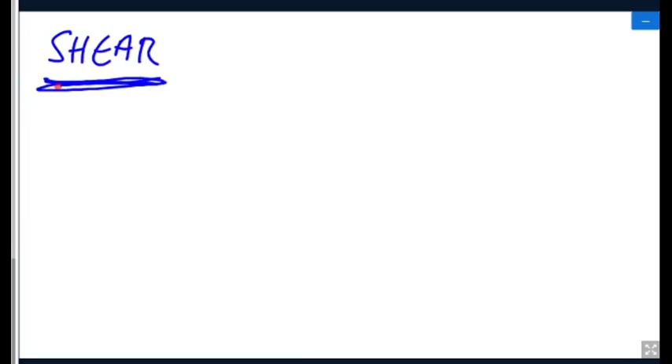Remember, we've been doing that. We did a bit on bolts last week.

Hello, Connor. 1:15 we start. Happy Christmas.

Bolts, when we did bolts last week, obviously the more bolts you've got, the more rivets you've got, the more area. Remember we did that? So if you want to bolt two bits of material together, you perhaps use a bolt or a rivet.

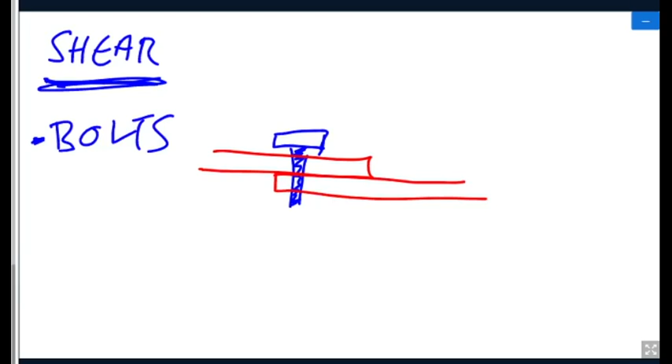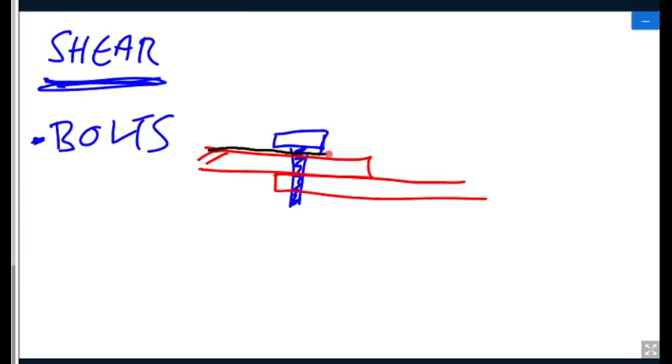Thought we started at 13:45. You've got to be better than that. You've got to be cleverer with excuses than that. I've come up with all of them before.

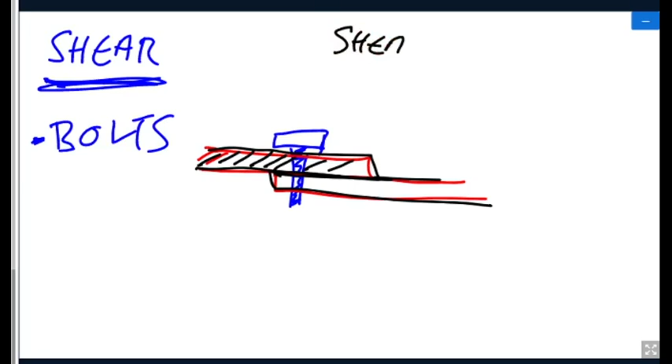Right, bolts. Don't forget, shear stress is still force over area. Shear stress, still force over area. Remember last week we did bolts and rivets. All right. So the more bolts you've got and the more rivets you've got, obviously the more holes you've got. But what makes 4 bolts better than 1 bolt? Can somebody tell me? What makes 4 bolts better than 1 bolt?

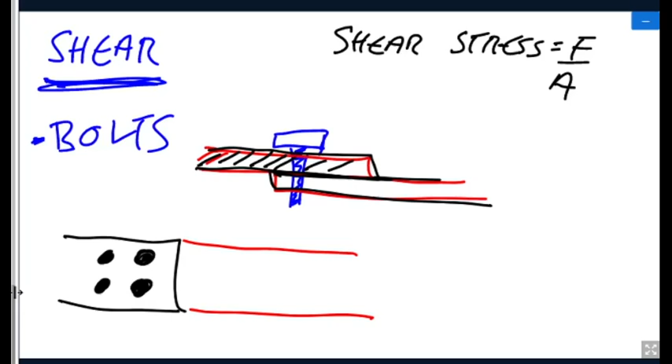More SA? Does that mean South Africa? More area, there we are. Because you've got 1, 2, 3, 4. So A, you've got more area. Because you've got this area here, if you remember. There's the bolt, so it's the area. Area of a bolt, pi r squared, things like that. So we've got more area. That's one good thing about it.

And number 2, another good thing about it is, right, we could have the force. You could say that the force is divided by what? In this example here. We've got 4 times the area, or we've got, what could we say? If we've got 100 newtons, what could we say is on each? What force is on each? We could say that, yes, and you could, right? Not necessarily right, but you could say yes.

We've got 100 newtons, we've got 4 bolts. Okay, well, I'm going to say then that we've got 25 on each. Because 100 divided by 4 should give you 25. So you've got less force per bolt. Not only have you got more area, you could do it that way. You've got more area, look, more area. Right. Got 4 times the area. Or we've got 4 times less of the force.

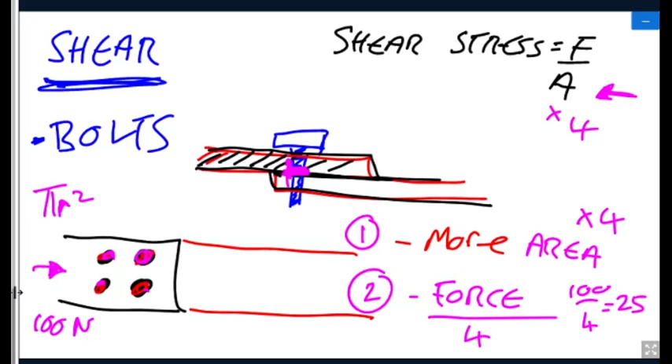That's why we have 4, 5, 6 rivets. Obviously, somebody made the point last week. The more holes you've got, the less strength you've got in the material. So you wouldn't go stupid. You know, you wouldn't have like 6 million rivets in a small bit of joint or small bit of metal. So we'll do a quick example just to refresh your memory.

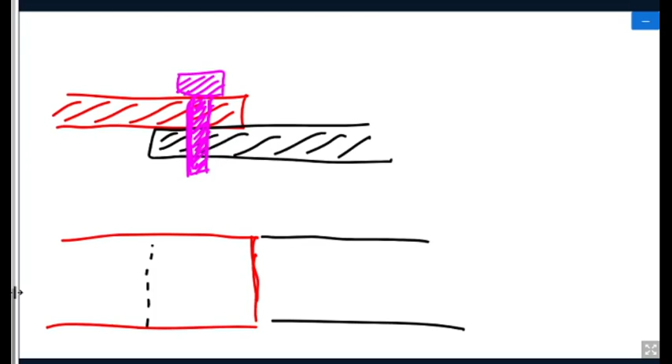Here's my 2 bits of metal that I want to put together. We'll have a bolt or something down here. That's the bolt. I'll draw it like looking down so you can just see what it looks like. That's the top bit, like that. Top bit there, and then the bit of metal is in there perhaps. And we've got, let's say, 1, 2, 3.

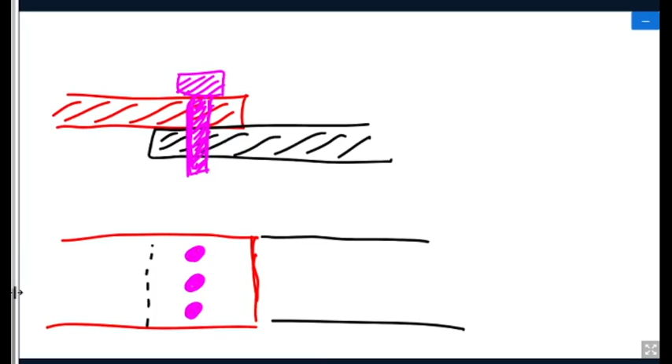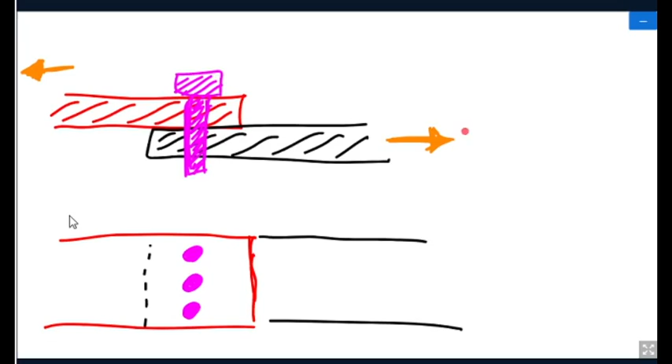So we've got a force coming this way now. We'll have a force coming that way. Oh, Gwilym. Force coming that way now, so I need a force. Somebody give me a force. Thomas Burbeck, give me a force. Any force, any number. Make it big. Thomas Burbeck, 77. 77 kilonewtons. Right? That's the force on this thing. Pulling both ways, right?

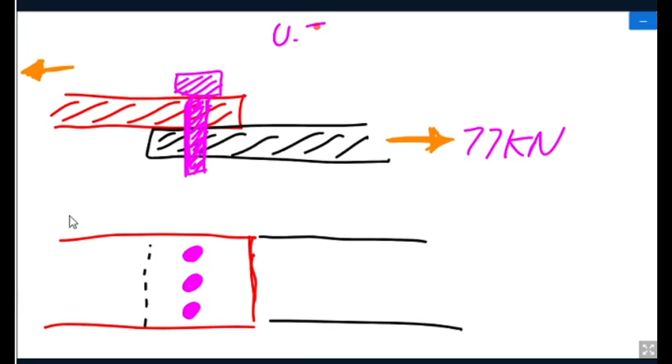Now, somebody give me, Alex Young, you can do this. Somebody give me a stress, like the ultimate stress that the bolt is going to break at. Just give me a number. It's going to be megapascals though, right? So just give me a number that this bolt, whatever it's made out of, this is the stress it's going to snap at. 100 megapascals, right? Okay. The only reason I'm doing that is because if we work out the correct stress, if it's more than 100, we're in trouble, right?

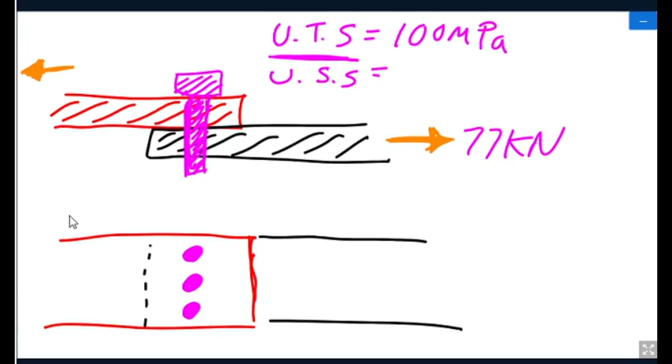So don't forget the ultimate tensile stress, or the ultimate shear stress in this case, because we're in shear. The same thing though, right? Ultimate shear stress, 100 megapascals. So not the same thing really, but you know what I mean? It's the ultimate. So this bolt, this joint, the material is going to break at 100 megapascals. We've got 77 kilonewtons. We need to work out, is it going to break? So we've got to do a bit of safety factor now.

So first of all, we've got to do this. Don't forget, we know that stress equals force, which we know, over area. So this will be our working stress. Whatever stress we work out here now is going to be our working stress. Hopefully it's going to be less than 100. Right? Because the material that Alex Young has picked is going to break at 100 megapascals.

So we've got force. I need to give you area. How are we going to find the area? Well, you need to tell me, or I need to tell you, what size bolts do you want? Bearing in mind we've got 3 of them. What size bolts do you want? 5 mil. Okay. So Daniel Greenshields has gone to Spa and he's bought 5 mil bolts.

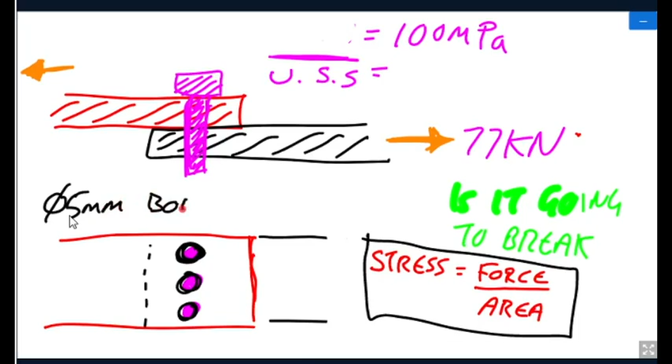We've got 3 of them, right? So the first thing we need to do is work out the area now. I'm going to go page 1, page 2. Right? We need to find the area, and it's going to be area times by what? Area times by how many bolts have we got? 1, 2, 3.

So find the area of 1 bolt. They're round, by the way, so that's cool, right? We've got 3 of them, so we'll times it by 3 and see what happens. So area. So we've got 5 mil diameter bolt. 3 of them. 3 of. Right, 3 of. You don't like it. That just means 3 of, right? So we'll do 3 of them. 3 bolts.

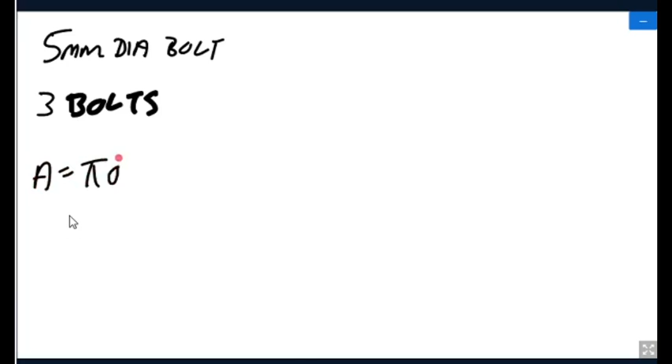Obviously area, so area is going to be pi d squared over 4. You can use that, or pi r squared. Area of a circle, it's up to you. Don't forget, 5 mil has got to be in meters, so 5 divided by 1,000. Because there's 1,000 millimeters in a meter. That's why we need to divide it by 1,000.

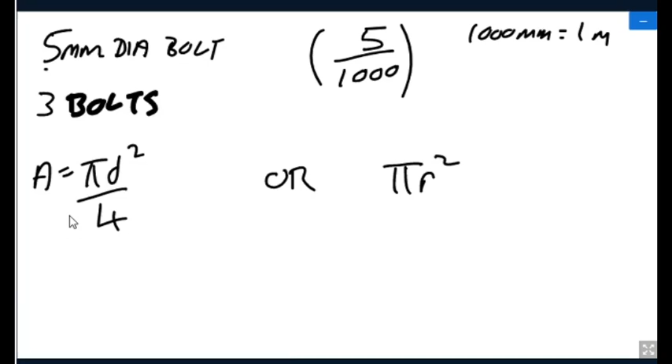So the area of 1 bolt is going to be this. Area is pi times by the diameter in meters, all squared, pi d squared over 4. Whack that in your calculator, and what do you get? You should get something. First one to answer correct gets a Mars bar.

I should really know this off by heart now. What do we get? What do we get? Sam Davis, Thomas Burbeck, Ty Richards, Max Barker, Lucas Banks. Come on, come on. Give me an answer. Are you awake? Come on. Am I talking Chinese to you? Give me the answer. Somebody give me an answer. I'm going to pick on somebody. Ty Richards, come on.

Five divided by 1,000 squared times by pi divided by 4. 19.63. Yes, well done. 19.63 times 10 to the minus 6. Make sure you follow me because I'm going to pounce on people. Well done, Ty Richards. Meters squared. That's the area.

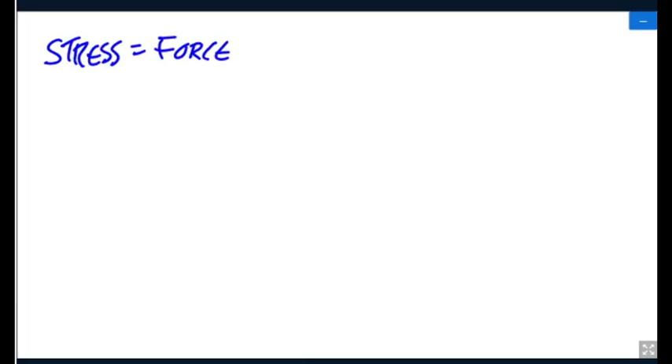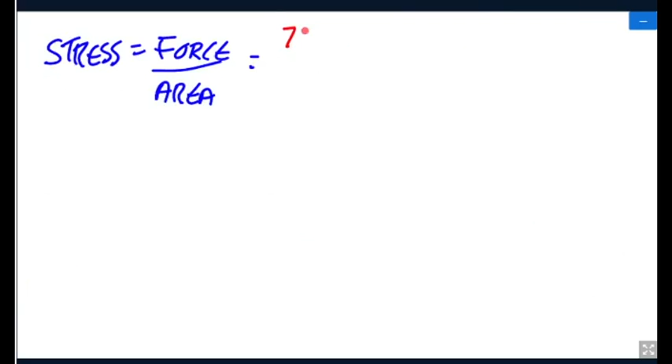So now, stress, in this case shear stress, is force over area. What's the force? 77 kilonewtons. Thomas Burbeck, don't forget the kilo. 77,000. That's the force. Divided by the area, which we just worked out, the total area, 58.9 times 10 to the minus 6. This will give us the stress that this joint is under.

So the bolts are going to break at 100 megapascals. That's what we're saying, right? That's the route we've gone down. So, if this is above 100, we're in trouble. Now, there's other ways you can do this, boys, but this is the one we're doing. Right.

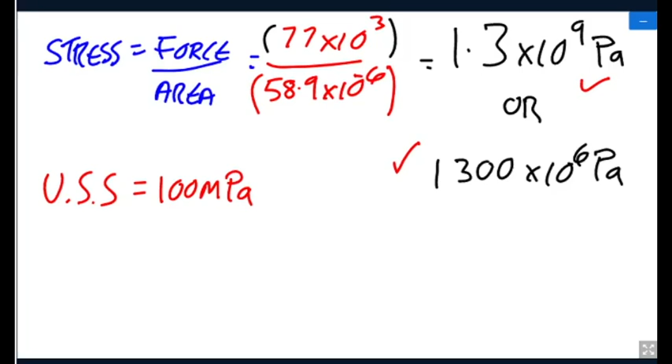But the stress that we've calculated, that we're working at, is what? That much mega. Are we in danger? Would you travel on this plane? Would you go on this bike ride? Would you drive in this car? Flipping no chance. It's going to break at 100 megapascals, right? Now the force that we've said is 77 kilonewtons. The bolts may be all right. We'll keep the bolts, but we may have to reduce the force a bit.

Yeah, it's like Daniel Greenshields airline all over again, or Mansell Davis lorries, if you've read in the paper about Mansell Davis lorries. Apologies if anybody drives for Mansell Davis. See in the paper, I think they've got to close.

So, don't forget the safety factor. This will tell us now. Safety factor.

Yeah, they've closed down Mansell Davis. They're going to close down because they were forging MOTs, apparently. Been on for years, Mansell Davis.

Safety factor, don't forget, is the ultimate over the working. Right? All that means is, what's it going to break at divided by what we're working at? This is what we're working at. So, some people have already seen it. So the ultimate is going to break at 100 megapascals, 100 times 10 to the 6. It's going to break at that.

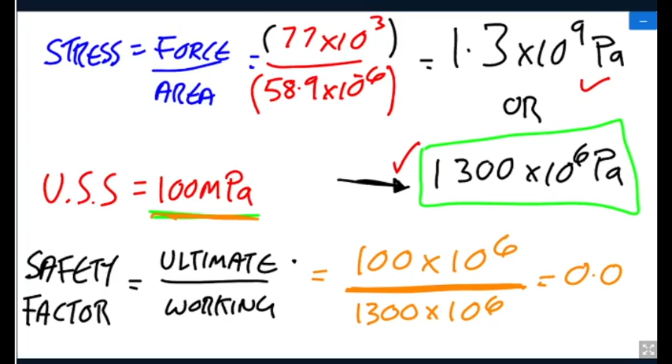James Bond. 0.0... 1/13th, yeah, you can do it as a fraction. All right, 0.07, 0.08, say that. That is why you shouldn't go on it. Anything below 1 is terrible, yes. This is well below 1, right?

What could you do? What would you do? There's two things you can do. You could either decrease that force, buy stronger bolts, or put more in. Perhaps. It's up to you how you want to do it. You may not be able to put more bolts in. You may not be able to. What?

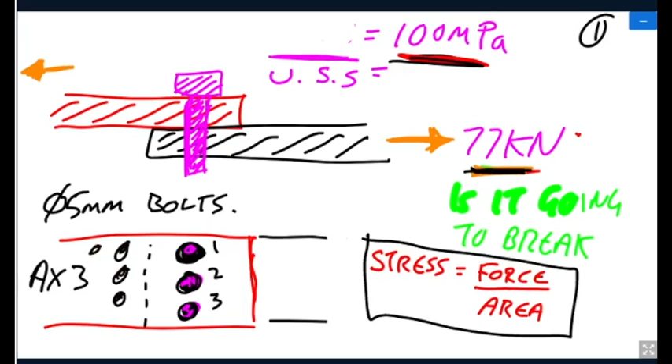77 kilonewtons. That's why more bolts, more bolts. That's why a plane is full of rivets, to keep the safety factor high. Reese Rivers is typing. That's one way you can do them problems, right? You don't need hundreds and you could need loads. You could work it out, if you found the area. But you haven't got to do that.

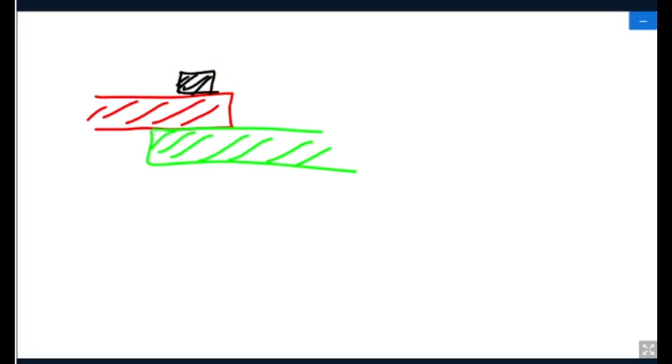Now then, you won't always get this, because it doesn't happen in real life. You're not always just going to get it nice like this, with two bits of metal like that and a bolt or a rivet like that. You're not always going to get it where you've got a force going this way and a force going that way.

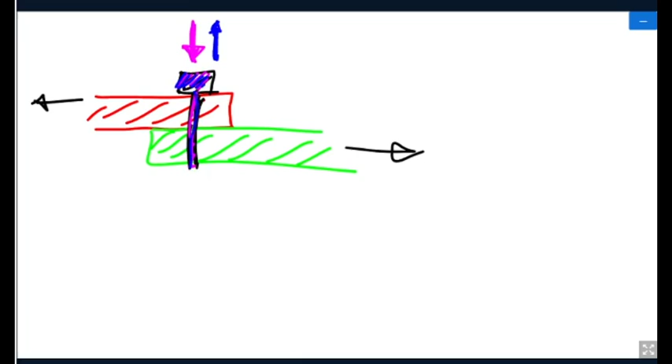Because sometimes, as in normal, you may get a force coming this way, straight down on it as well, actually pushing on it. You may also get a force pulling on this bolt as well, in real life. You also may get a force perhaps going like that.

Don't forget, if you've got a force going like this, like we did in vectors, there's going to be a force going this way and a force going that way. Huh? Obviously, I need to give you the angle. Right?

So, let's see what happens when you do that. I'll give you this example, right? Because you've got to do a bit of maths now. Okay, remember we did this? F cos, F sine. This may give us the horizontal component, if you remember, and this may give us the vertical component, if you remember back that far.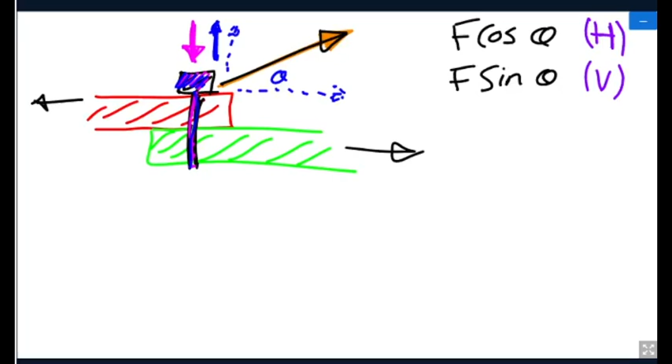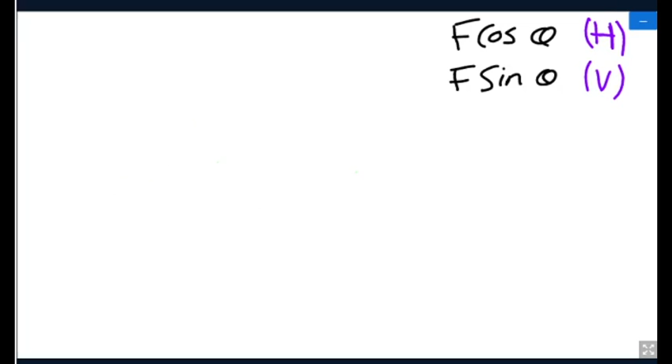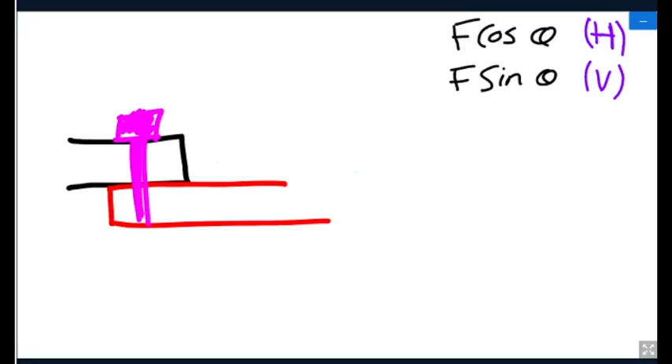So, you could have an example like this. We'll do it on here. Let me just rub out this bit here. Let's rub out all this bit here. You could end up with a bit of metal like this and a bit of metal like this. Put them together and we could have a bolt or a rivet in there like that. You may also have a force just pulling on it like this. All right, I'll just draw it roughly. We've got a force pulling like that.

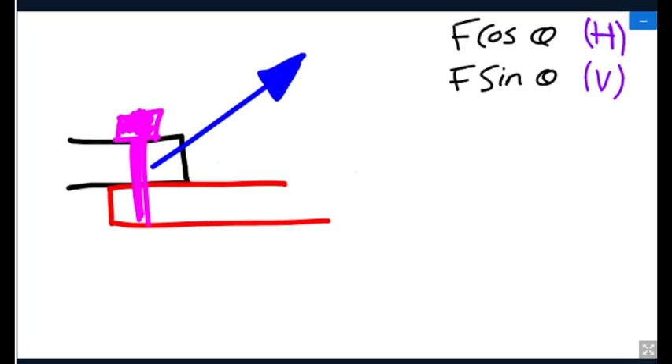Okay, so we need to work out what's the force in the shear direction there, and what's the direct force. So if I've got a force like that pulling on that bolt, somebody give me a number for force. This resultant angled force, 200. Let's go really, really big, shall we? 200 kilonewtons pulling on this poor bolt. Bless it.

So that there is the force coming in this direction. Now we don't like that, do we? Because we can't do a lot with it. We need to convert it. Don't forget, every resultant force, you can break it down into its horizontal component. Now, is that horizontal component going to be shear stress, or is it going to be pulling or pushing on it? Is this going to be shear here? It's going in this direction.

Let's use a different color. What could we call that direction? Is it tension, compression, or shear force? Shear, yes, well done. If you can find that horizontal, that could be the shear force. Don't forget, we've also got this.

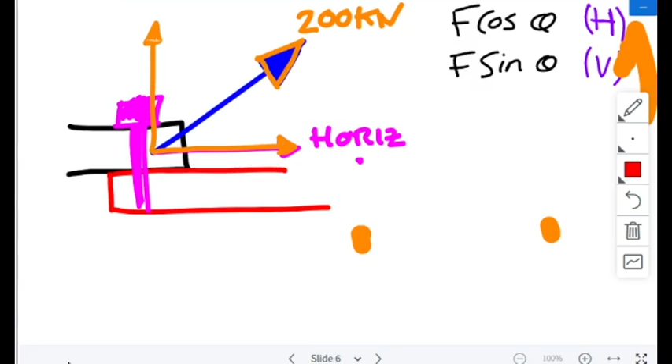Oh, what have I done? Hang on, boys, I've done something here. I've sort of zoomed out on my blimmin' Apple thing here. Hang on, lads. Sorry, lads. Let's see if I can do this. I've pressed a button, so it's all gone funny. Right, I think I'm back on. Can you still see me?

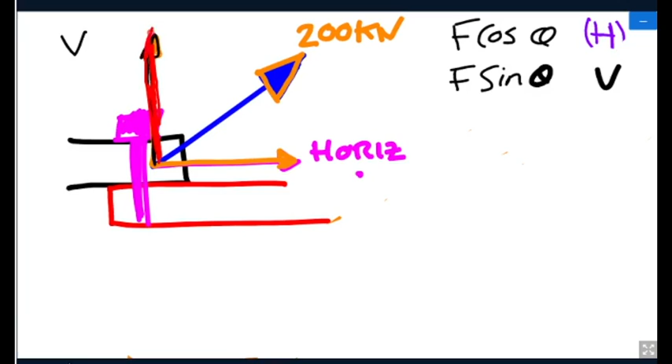Anyway. Right, if we look at the horizontal, that would give me my shear. Now, if I worked out the other one, what would that give me? Is that going to be tension or compression? Tension, well done, Callum. It's pulling on the bolt. So this bolt has got tension and shear. This is going up, directly on the bolt. That's tension. It's pulling on that bolt. This force here is horizontal. It's shear. It's trying to shear the bolt off. So that 200 kilonewtons is going to try and shear the bolt and pull it out the hole.

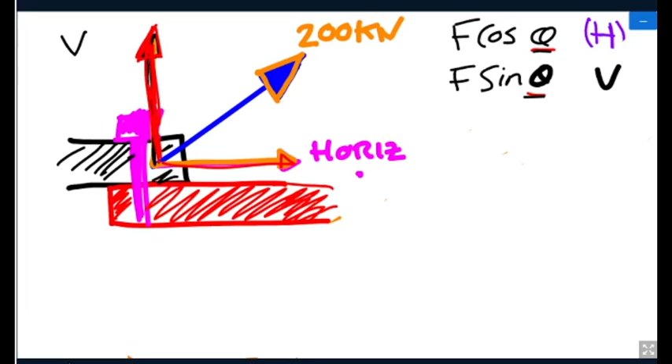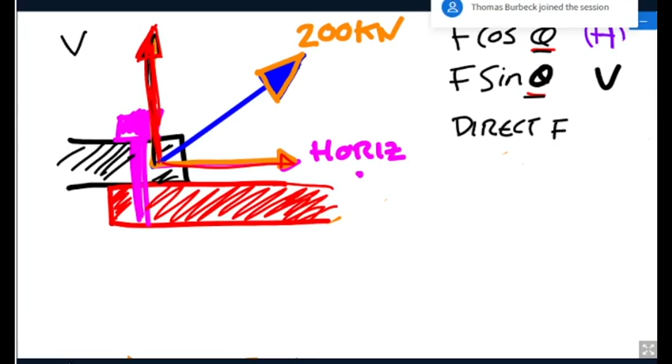What do we need to work out this force? What have I got to give you? A quick hint: an angle, right? So let's just say we've got this bolt, 200 kilonewtons coming like that. We need to calculate the direct force, which just means the tension, because it's pulling. This is the direct, it's directly on it, and the shear force, which is this. So that's going to be the vertical, and this is going to be the horizontal.

So I've got 200 kilonewtons, like we've done previously. We need to break this down into horizontal and vertical. The horizontal will give us the shear stress because it's going in that direction, and the vertical will give us our direct tension. It's pulling straight on the bolt. 200.

Callum's quite right. We need an angle. I'll give you an angle of, I'm not going to give you 45. Let's do 30. So all that means is this, that I've got a force now of 200 kilonewtons like this. And I need to work out this horizontal and this vertical with my angle in there, 30 degrees.

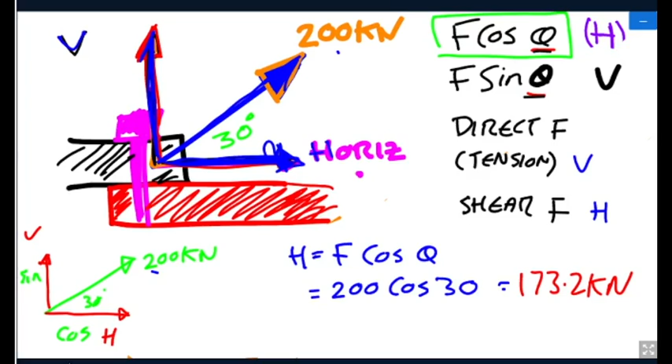So that's the horizontal force. So that's the force really going this way. That's the force trying to shear this bolt off. Right? Because the bolt, if it works, it's going to shear it and pull it out. So now, the vertical one, what's the vertical one going to be? Well, that's this one. This is the one trying to pull it up. That's going to be F sine.

What's the F going to be? The F is still 200, isn't it? And sine of 30. 100, there we are. Sine of 30 is half. Always check that. That just means there's a force trying to pull this thing out, causing a tensile stress on it of 100 kilonewtons.

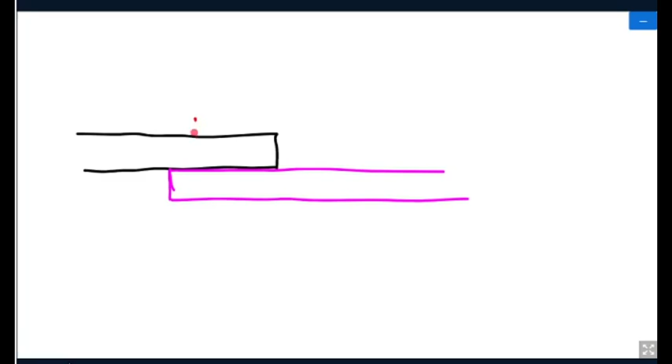Kilonewton is 10 to the 3, yes. Yeah, kN is 10 to the 3. What's the matter? What's gone wrong here? 200 sine, 200 kilonewtons. Well, you've got to put the 200 in. 200, you could put the kilonewton if you want to. You get the same answer. 200 times by sine of 30. Well, if you put 200 in there, it will, yes.

I've left out the K there. It just makes it a bit easier. Saves writing it in. It is kilo, right? So in there, strictly speaking, that should be 200 times 10 to the 3. I just write it in and remember to put it in at the end. You're right, you should put it in, really, because if you forget you just end up with 173, wouldn't you? It just saves writing it, as long as you know at the end it's kilo. It's the wrong way, really, because you could forget and make another mistake.

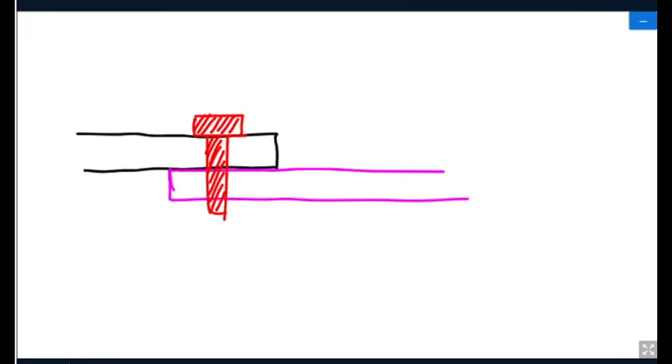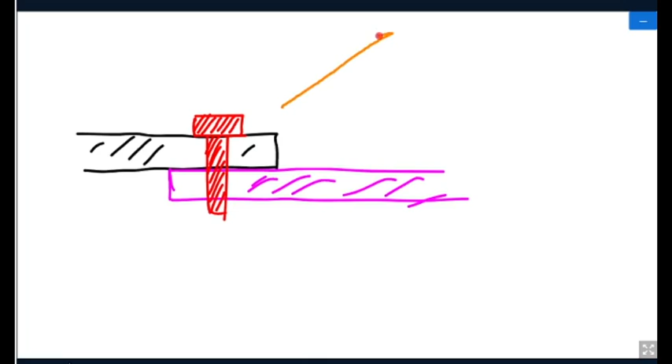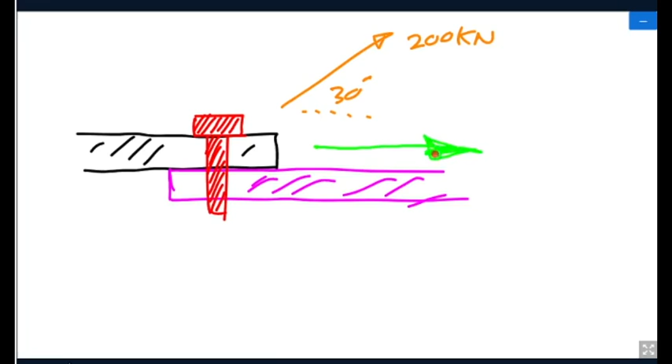So that's the bolt, right? So what's really happening now, due to this angled force of 200 at 30 degrees, this bolt now has got two forces trying to get it. It's got a shear force going that way, which we worked out to be 173.2 kilonewtons.

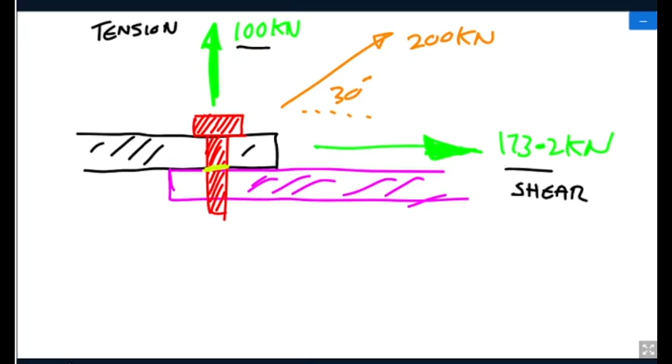It's also got a direct tensile force trying to pull it up of 100 kilonewtons. So this poor bolt now has got two forces it needs to cope with. It's got a shear force, trying to shear it off, trying to break it in here. And then this one is trying to pull it. So that's tension. That's trying to pull it up. This is shear force. This is tension.

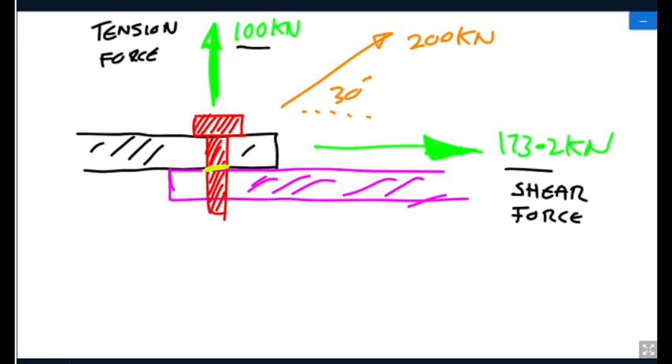So we need to work out now, what's the stress in each direction? We'll just consider one bolt for now. If I had 5 bolts, I could do something different, couldn't I? Daniel is trying to cut corners. He's only going to buy one bolt. If I had 2 bolts, what could I do with that force? Divide it by 2, so each one's got 100. If I had 3 bolts, you can divide that by 3. It's up to you. Okay, one way you can do it.

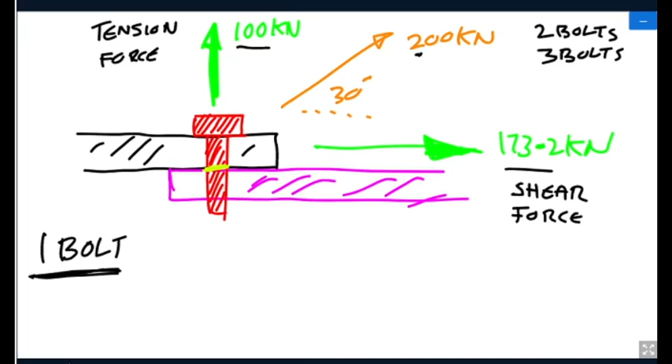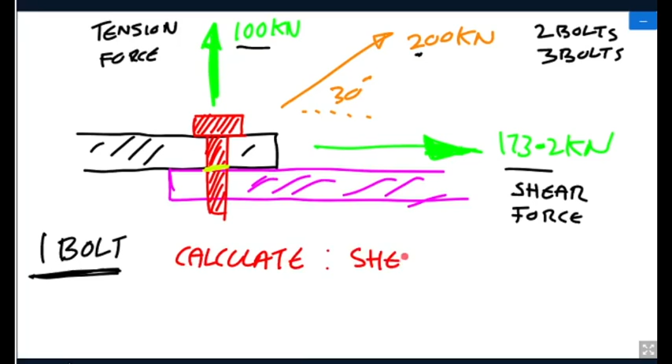So then you've got an angle. We've worked out the force now using that 200. All right, 1 bolt, that's why we only use the 200. So we can work out now, calculate shear stress. Don't forget, it's just force over area, shear stress, and direct stress.

Now all that means is that direct stress just means really this. It's directly on the bolt. So that's the direct one. It's directly on it. This force is directly on that bolt. It's going up, it could be coming down. It's direct. Don't forget the force, right? Shear stress, direct stress is the same, force over area. What's our force?

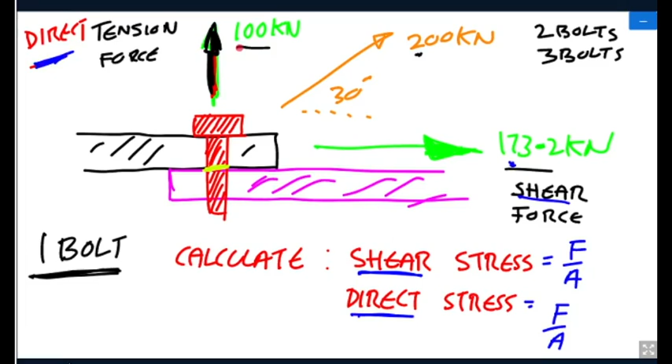Well, for the shear stress, it's going to be this, isn't it? That's going to be 173 because we're doing shear stress. This is the shear force, 173. So for direct stress, which is this, the tension, it's going to be 100. Is it going to break, do you think? We don't know this material, but there's more force trying to shear it off in there.

So we've got the forces, right? I now need the area. So Daniel, what size bolt have you used? Oh, for plenty. 2 mil. You've used a 2 mil bolt. Okay. Shortcutting all the way. So, in his cost cutting exercise, Daniel has used a 2 millimeter diameter bolt. It's even worse, we've only got one bolt.

Don't forget rivets, by the way, lads. Rivets aren't that big. That's why I've got loads of them. So we'll stick with Daniel. He's got a 2 mil diameter bolt, which means we need to calculate the area. It's going to be the same area regardless. So area is just going to be pi d squared over 4. So shear stress, force over area. We know the force. We know the area in a bit. Direct stress, tension. We know the force is up here. We know the area in a bit.

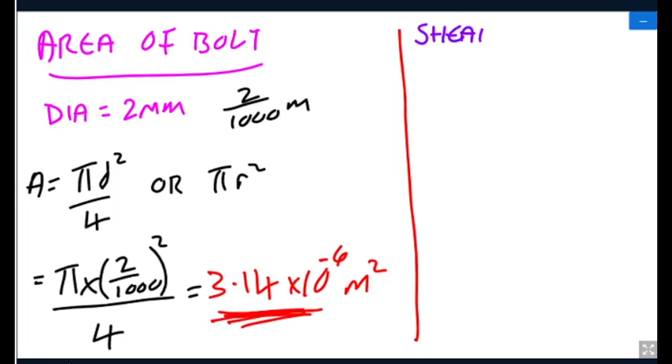3.14 times 10 to the minus 6 meters squared. That's the area of his one bolt. It's a rivet, really, a very, very small bolt. That's the area. That's what we're going to use. So first of all, because we're air crash investigators, we need to calculate shear stress. Shear stress, don't forget, it's the same formula, force over area. So the area we know is this.

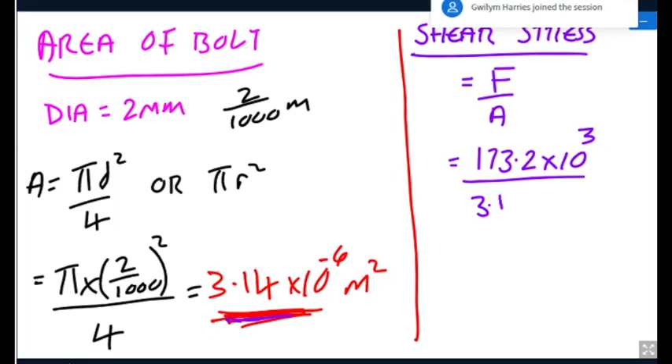The shear force is 173.2 kilonewtons. That's the force trying to pull his bolt out. 173.2, don't forget the kilo, divided by the area, which is 3.14 times 10 to the minus 6. This will give us the shear stress on this bolt. 173.2 kilonewtons divided by 3.14 times 10 to the minus 6. That's the area of Dan's brilliant bolt.

Flipping hell. What's the answer? Connor Richards, Colin Backhouse, Benjamin, Archie, Alex. Very, very small bolt. Yeah, there we are. 55 point 2. Let's make him really, really bad. 55.2 times 10 to the 9 pascals. 55.2 gigapascals. That's the shear stress.

There's something like this on YouTube, yes. This is being recorded, by the way, Lewis.

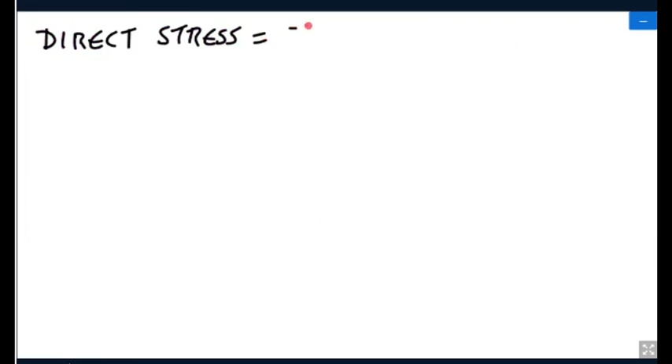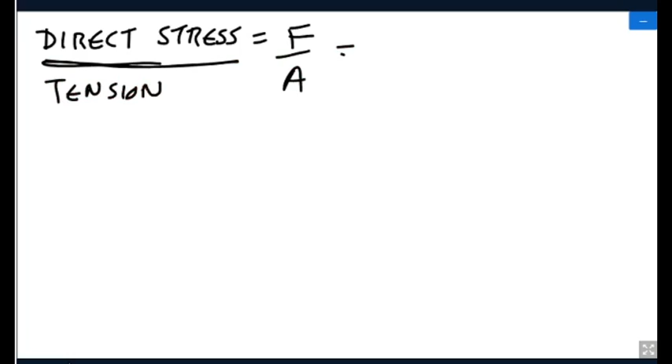The direct stress, that just means tension or compression. It's directly on the bolt. That's all that means. It's directly on it. Still force over area. What's the force in the direction? That's tension, right? We've got it in tension at the moment. What's the force in that direction? Where is it? 100. Don't forget, it's kilonewtons. All divided by the area.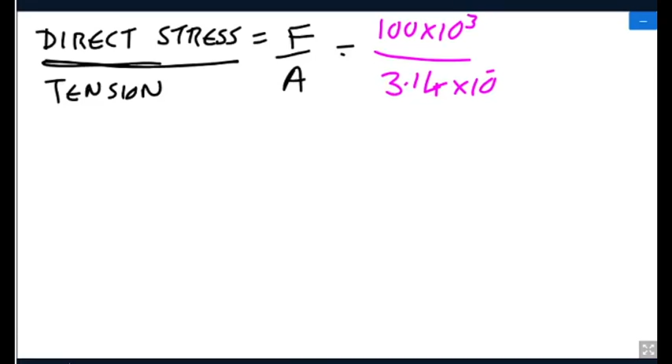It's the same area. Dan's dodgy bolts. 3.14, so it's pi times 10 to the minus 6. It's the same area. 3.14 times 10 to the minus 6. This will give us the stress, the tensile stress, really, because it's trying to pull it. So it might snap this now, might not. We don't know yet. 100, divide that by all of that number. That's what you boys are doing. Delete 6. There we are.

Press ENG, right, because your calculator may give you to the power 10. Your calculator will give you this actually: 3.18 times 10 to the 10. Right, this hasn't got a symbol, so press ENG. You can move it one. 31.8 times 10 to the 9 pascals. 10 to the 9 is giga. 31.8 gigapascals.

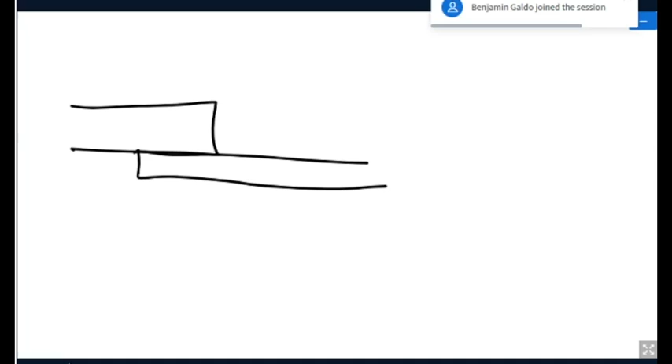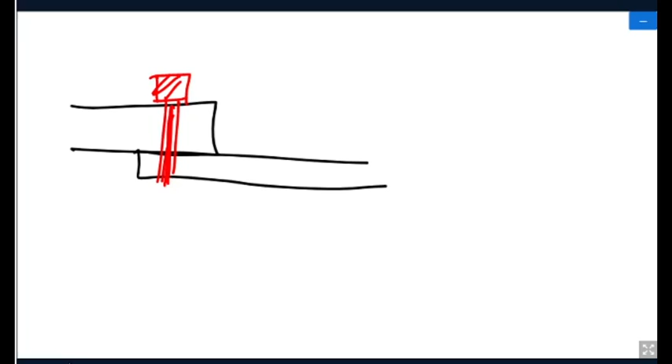So we now know that we've got a stress in this direction, and we've got a stress in this direction. Let's find out, is this safe, right? So I'll just quickly draw this again. There's that, and there's that. Our bolt was here. There was a force on it, like this, 200. And in the end, we worked out that there was a stress going this way, because there was a force going that way.

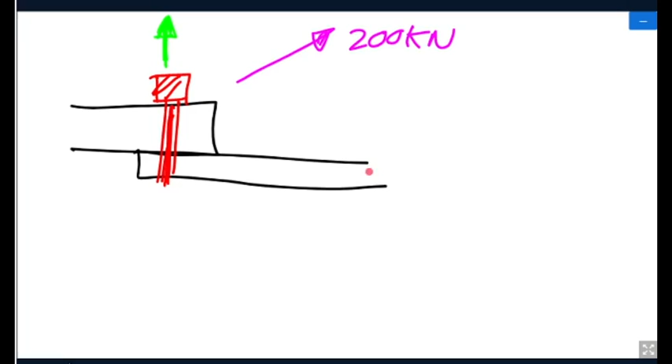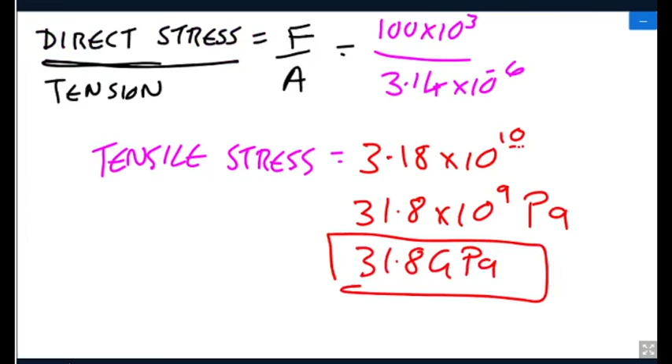There's also a stress going this way. There was a force going there, and there was a force going there. We worked the area out of Dan's dodgy bolts. Gave us a shear stress and a direct stress. The shear stress was 55.2 gigapascals. That's shear. That's how much stress is trying to snap this bolt. It's also got a direct stress up here, which is tension. It's trying to pull it, tensile stress. It's directly on it, 31.8 gigapascals. That's direct. In this case, it's tension.

Flipping I won't come onto your plane, Daniel Greenshields. Sheesh.

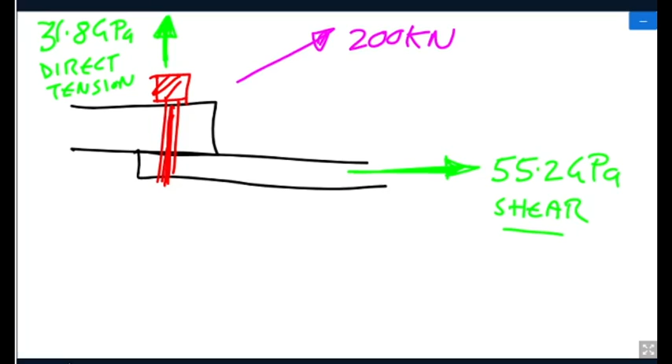So let's pretend now, right? This bolt has got ultimate tensile stress, right? Now this bolt is going to break at 500 megapascals. So when this bolt is under a stress of 500 megapascals, it's going to break, right? So is it safe in that direction?

And I'll also give you, this bolt has also got ultimate shear stress of, let's say, 750 megapascals. That just means if the stress in the shear direction is near 750 megapascals, it's going to shear off. So we can work out now the safety factor in tension and the safety factor in shear. Don't forget, if it's below 1, we're all dead. Apart from Daniel Greenshields, who's probably jumped out of the plane by now.

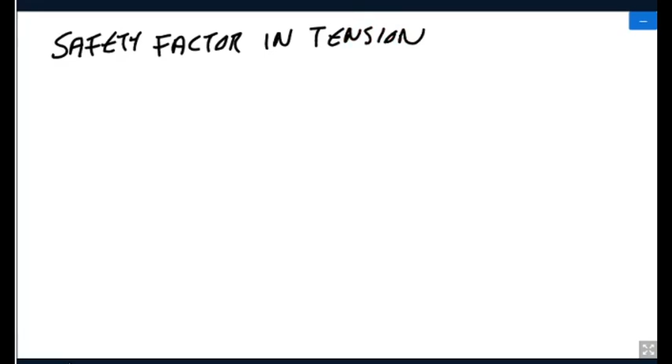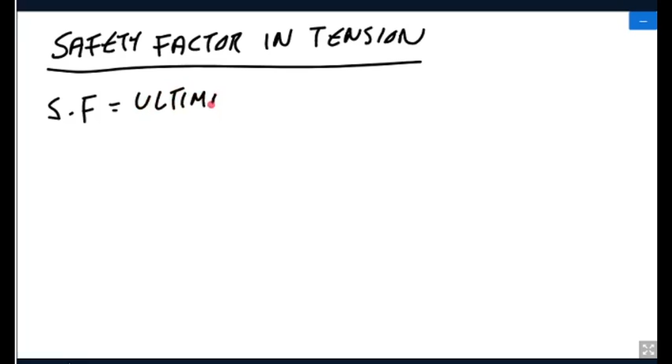So, safety factor in tension. SF is safety factor. Don't forget the safety factor is going to be the ultimate, what it's going to break at, all over what we're working at. We're doing tension now, right? So is it safe in the tensile direction, which is up and down? Don't know yet. The ultimate tensile stress is 500 megapascals. So it's going to break when it gets to 500 mega.

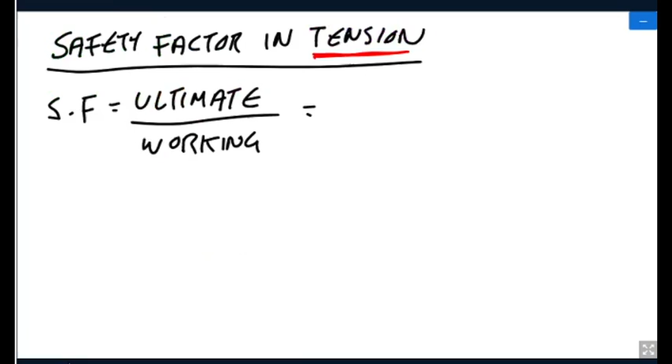Hopefully you can see that it's not safe, right? It's going to break at 500 megapascals. There, look, ultimate tensile stress, 500. What is the stress that we've worked out due to this force on this bolt that he's trying to cut corners with? This is why it happens, by the way, when people cut corners. We know there's 31.8 gigapascals going in that direction. Holy moly. 31.8 times 10 to the 9. This will tell us if it's safe or not in the tensile direction.

Is it safe? 500 mega. Don't forget to put the mega in. Divide by the giga. What do you get? What's the safety factor, Daniel Greenshields? You've designed this plane with a safety factor of, come on, what is it, Dan? I'm going to name and shame you. 500 mega divided by 31.8. Don't forget, Lewis, this here is giga. 0.0157. I thought Daniel had gone all shy then and tried to scarper and left the country.

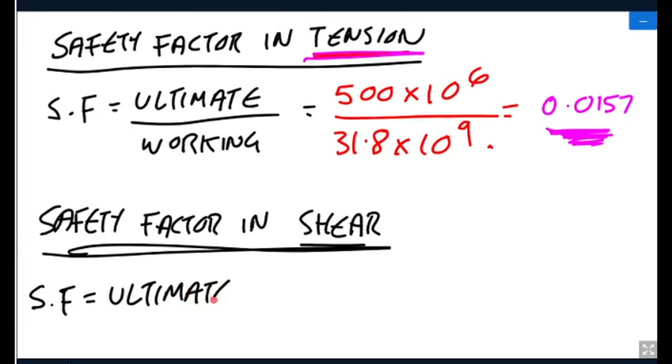So, safety factor in shear is again going to be the ultimate over working. The ultimate, what it's going to break at, in shear, what is it going to break at? It's going to break at 750 megapascals. In shear now, 750. So it's a bit stronger in shear, but it's not going to make any difference whatsoever by the looks of it. 750 megapascals, ultimate shear stress of this bolt, 750 mega. What's the shear stress? Well, it's 55.2 giga.

I think we're dead in both directions, right? Type it in. Obviously, it's miles, right? Because it's going to break at 750 mega, but we're going at 55.2 giga. Nought point 0.013. It's even worse. So the safety factor is 0.013. So it's going to shear off due to this force on this small bolt. It's going to snap. The bolt's going to snap off and shear off.

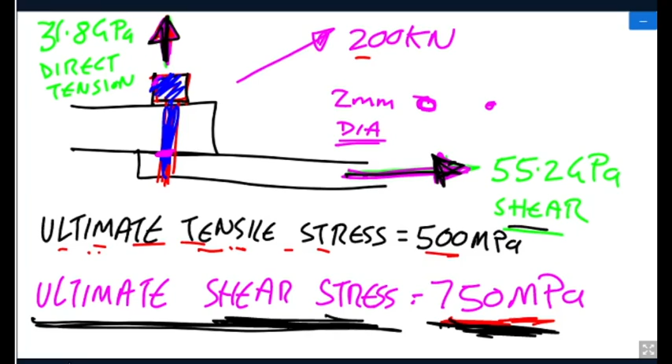Obviously, the 2 mil bolt could be the reason. We've only got one of them. So Daniel, I would suggest you go and read a book on trading standards. We've only got a 2 mil diameter bolt. That's 2 mil. That's not even life size. 2 mil, tiny. Can't even draw it here. Come on, Dan. So you either go more bolts, bigger bolts, less force, whatever you want to do, but it's not much, 200 kilonewtons. The bolt is where your problem is. That's where the problem is.

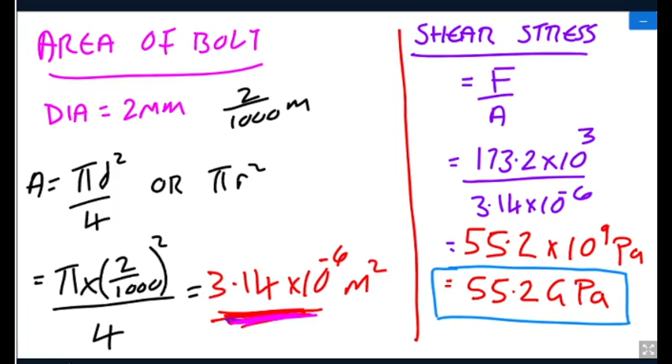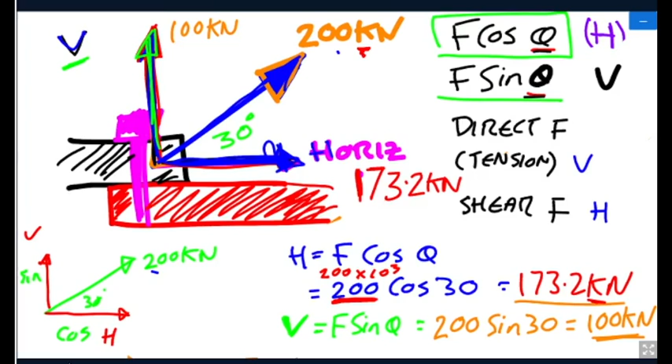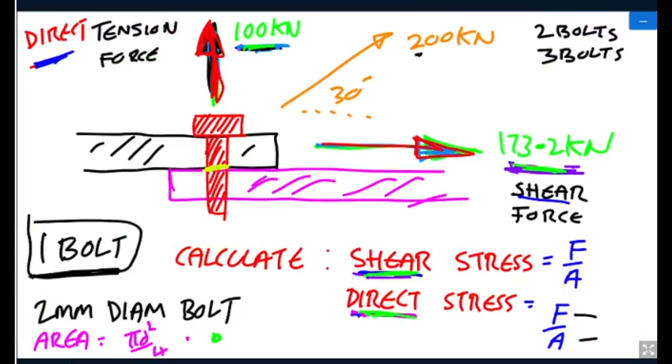Now, like I say, this will help you in the merit. Don't forget the merit question is a bit more thinking. We'll have a break for 15 minutes and I'll show you the assignment. The passes are fairly all right, but the merit question has got a bit of this stuff in it. When we come back, I'll show you the assignment. Some of you have already done the beam one. It's issued now, it's on Moodle right now. I'll go through it though, and we'll have a go at some of them in the class.

There's passes and merits. It's on Moodle right now. Don't go to the enhanced one because you'll have different numbers. You've all got different numbers. There's 4. There's vectors, there's a beam, there's a couple of stress ones, and there's a merit, which is like this with an angle and 3 bolts or something like that.